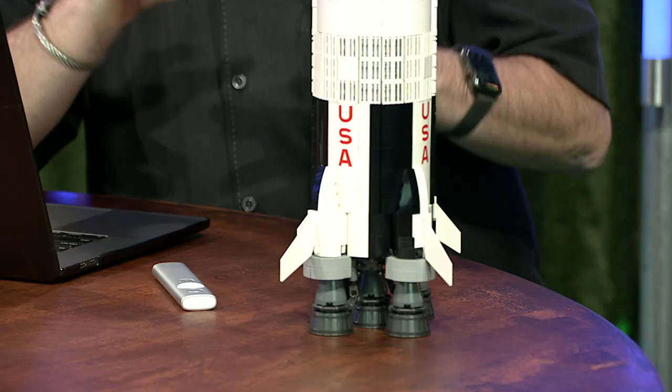So this is a Lego model that I built of the Saturn V. It's a complete moon rocket. It actually consists of 1,969 pieces. This was my very first Lego project that I ever built, and I built this over the holidays that have just gone by.

So to explain a little bit about this rocket, it's really a 3-stage rocket. It consists of 3 individual stages. Let's take this apart so we can actually see the individual stages here. Here's the 3rd stage that I'm taking off right now. And then this is the 2nd stage. And then we have the 1st stage here.

So let's examine what each one of those stages is kind of all about. It's a 3-stage platform. It takes 3 stages to launch a man to the moon. The complete rocket, as you can see here, weighs about 6.4 million pounds fully fueled, so about 3,000 tons fully fueled.

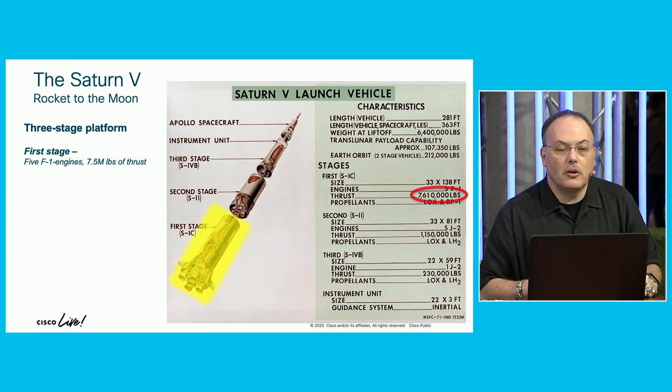It has about 7.5 million pounds of thrust in the 1st stage. So 7.5 million pounds of thrust, 6.4 million pounds of weight, 1.1 million pounds of positive thrust, and up it goes. That 7.5 million pounds of thrust comes out of 5 engines in the rocket.

Then we have the 2nd stage, which also consists of 5 engines, but they're a different type of engine called the J2 engine. This is a cryogenic engine. Altogether, they develop about 1.15 million pounds of thrust out of the 2nd stage.

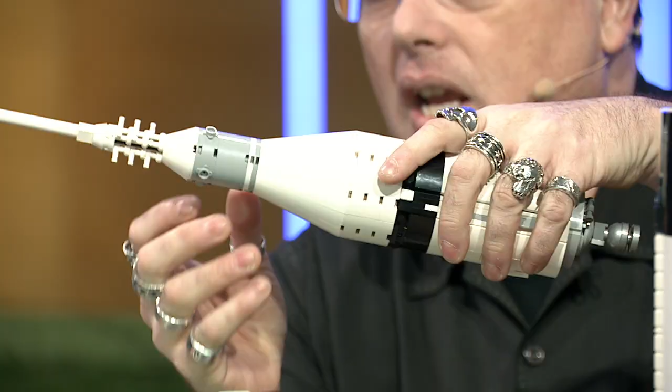And then finally, the 3rd stage, which is one J2 engine, and this is the stage that would actually take the man to the moon. This component would go into orbit around the Earth. This stage would actually burn again a 2nd time to launch the person towards the moon. Then they would jettison the 3rd stage, and the lunar module and the command service modules would actually end up going to the moon.

So we're going to talk a lot about the development of this rocket, specifically about the development of the engines on the bottom of the 1st stage, because that's really what my hero, Paul Castenholz, worked on and perfected - the rocket engines that are in there.

So this vehicle is one of the most complex machines that's ever been built by humans. It had over 3 million parts in the rocket in total and stood fully assembled over 363 feet tall. So it's just a massive, massive thing. If we had a human being standing next to this, the human being would be smaller than my fingernail here compared to the total size of this rocket, just to give you some idea of how large that actually is.

And there were actually challenges between the different teams, the German team and the American team, that were working on developing this rocket in terms of doing what they called man rating the rocket stack. In other words, how many times do we build this rocket in total before we dare to put a person on top and actually launch it? That's called man rating the rocket.

Now, if you take a look at the commitment that the United States made to getting man to the moon, you had John Kennedy, who stood up and said, this country should commit itself before the decade is out to the goal of landing a man on the moon and returning him safely to the Earth.

In other words, this is a goal: landing a man on the moon and returning him safely to the Earth, and this is the goalpost — before the decade is out.

In order to get to the stage where they could be prepared to launch this complete, very complex vehicle to the moon, there were two approaches to engineering that. One would be to build and test the first stage multiple times, then once perfected, build and test the second stage multiple times, and once that's perfected, build and test the third stage multiple times. If you had unlimited time, you could do that. But we had to get a man on the moon by the end of the decade, so there were just several years to get it all done, to build and assemble this massive rocket.

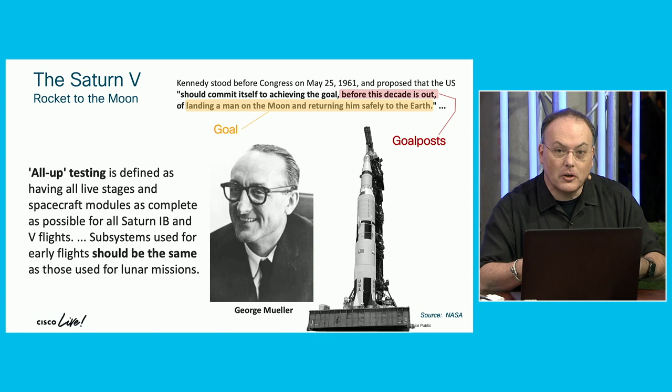So they moved to a system called all-up testing. All-up testing basically says they built the entire rocket stack all at once, all that complexity, and launched it all at the same time. This was the concept of all-up testing, which was really the brainchild of a gentleman named George Mueller, who pushed this concept through considerable resistance initially inside the organization. But eventually they had to move to all-up testing to meet this timeline, to meet this goal. You can imagine the pressure on the engineers to achieve such a complex thing in such a short amount of time.

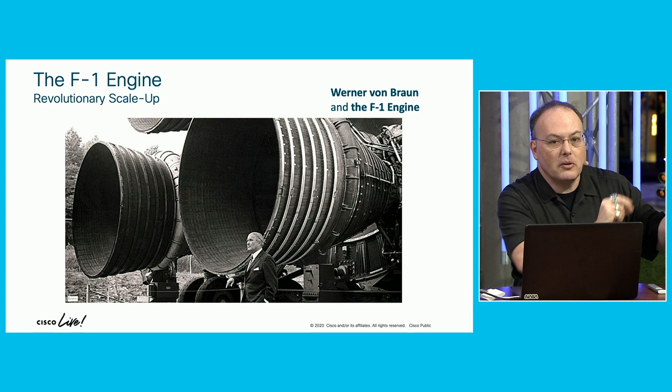Now the F1 engine on the bottom of the rocket was revolutionary, much bigger than any other engine that had ever been built before. Here's a picture of Werner von Braun, the father of the Saturn V, the inventor of Saturn V in many ways, next to a picture of just one of the F1 engines. You can see the massive scale of that F1 engine compared to a human being — they're just massively huge.

Now we're going to talk a lot about the engineering of the F1 engine, but what I'd really like to do is let the engine speak for itself for just a minute and let you observe the awesome power of this engine during liftoff. So let's take a look at that.

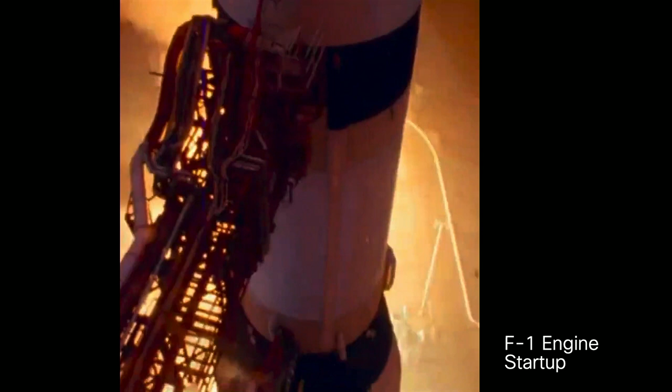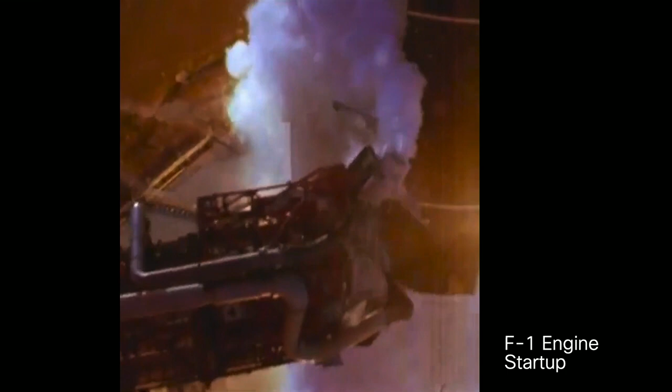Just astounding to see the power of these engines. I never get tired of watching these videos.

So the F1 engine was the instrumental component used for the first stage engine in the moon launch, the engines on the bottom of the first stage. And what did this first stage actually do during launch? Well, it launched the entire rocket stack — remember, 6.4 million pounds of rocket — 50 miles downrange, 40 miles in altitude, and accelerated the rocket up to Mach 7, seven times the speed of sound. It only lasted 2.5 minutes during flight before they would cut off the first stage and go to the second stage, and during that 2.5 minutes it would burn 4.5 million pounds of fuel.

So it's astounding that this engine was much bigger than any previous engine — on the order of 10 times bigger than any engine successfully built before. It was a massive engineering problem to build something that big. In rocketry, when you increase the power on a rocket by 10 to 20 percent, you've achieved something fairly significant. Here they were going 500 to 1,000 percent bigger than rocket engines previously built. And that's what you have to do to get to the moon.

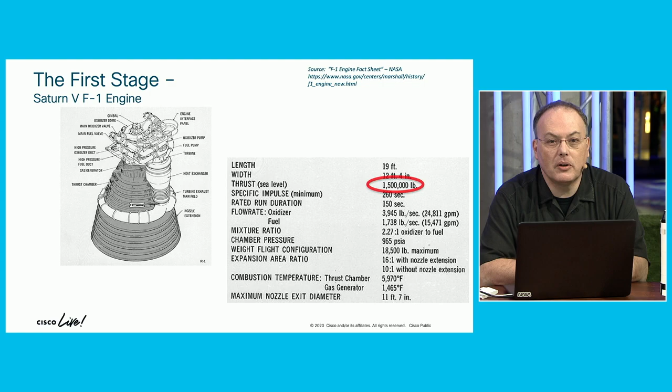Here's a close-up view of a little bit of the F1 engine. I'll point out a few key components: 1.5 million pounds of thrust per engine. This is the biggest liquid-fueled rocket engine, even to date, that's ever been built. It had a chamber pressure approaching 1,000 psi inside, and a temperature inside the combustion chamber approaching 6,000 degrees.

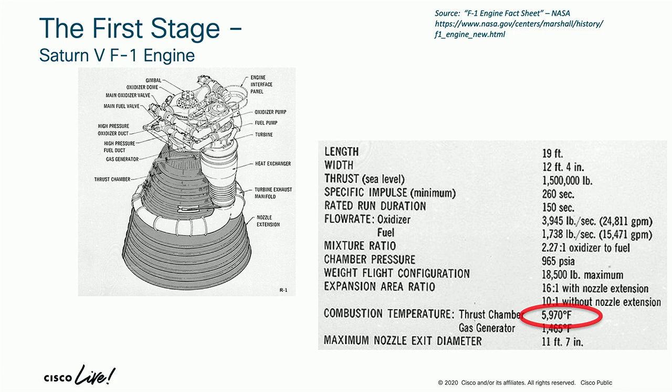So imagine the materials that you have to build this out of to withstand that kind of temperature and pressure.

Let's zoom up a little bit on the top of that engine. This is a picture I took of the back of one of those engines when I was visiting Cape Canaveral at Kennedy Space Center. One of the things I've circled, if you can see it, is this component right in the center, which is the injector plate that person was washing off on the deck of the ship before. That's what sits right at the top of the engine bell, and the injector plate is where the fuel comes together, what we call RP1 and LOX.

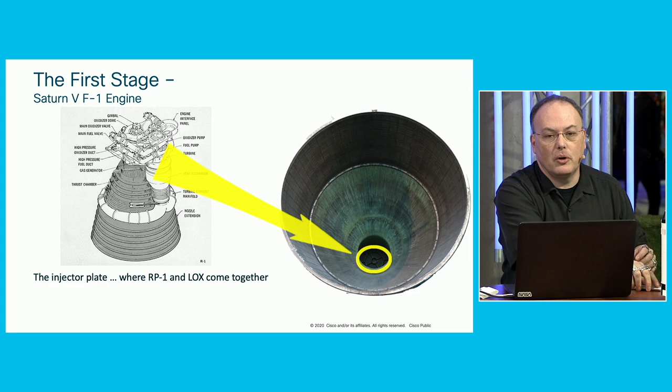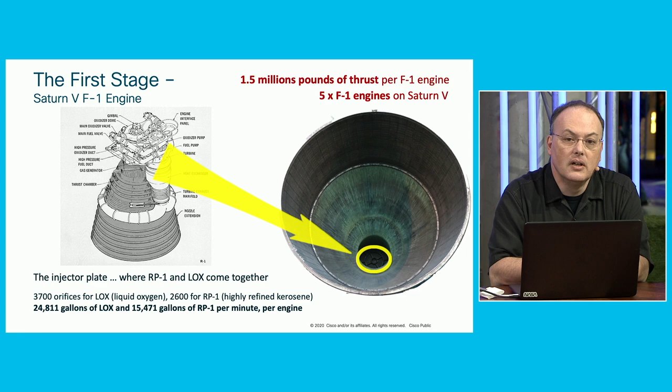RP1 is rocket propellant 1. It's basically a highly refined form of kerosene, and liquid oxygen come together at the injector plate, mix, combust and burn. So the fuel rates through that engine are pretty astounding: 24,000 gallons of liquid oxygen and 15,000 gallons of RP1 per minute per engine. That type of flow rate, with 5 engines on the bottom of the Saturn V, will empty an Olympic-sized swimming pool full of fuel within about 3 minutes. It's just an astounding amount of fuel that has to flow through these injector plates.

Now the big problem they had when they developed this engine is it's what we call dynamically unstable. Let me explain what that means. When the engine is burning and the fuel is combusting, there are pressure waves that form within the engine bell. This is normal and natural, but the engine waves need to dampen themselves out so that we don't get a self-reinforcing construct going, where if the pressure waves start to feed on themselves, the engine within a couple of seconds will either melt or explode.

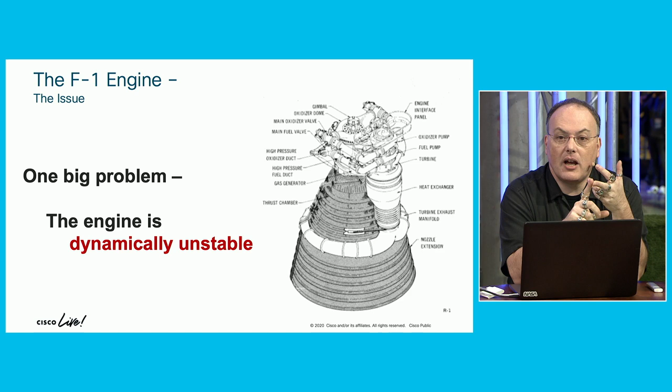And if that's happening below 6 million pounds of highly volatile rocket fuel, it would instantly be adios rocket, adios astronauts, and because that would be happening live on national TV, adios moon program. So it's very, very important to solve this problem of the instability of these engines.

Now, what they do when they're testing engines is they put them onto a test stand out in the desert, and they test to see how well the rocket works. So we burn it for a few seconds, and a few seconds more, and a few seconds more, up until the full rated thrust of the engine.

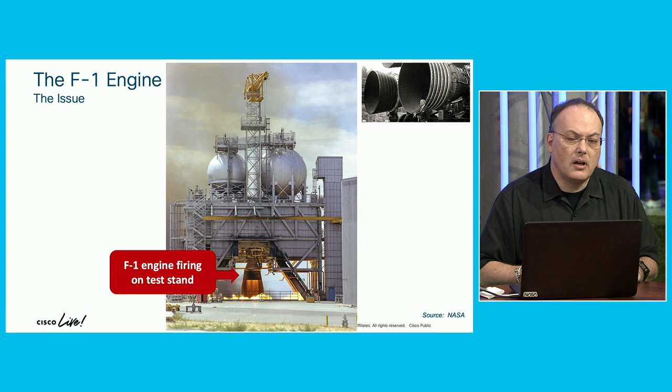On June 28th, 1962, combustion instability resulted in a total loss of one of these F1 engines. When they were putting it on a test stand like this, you can see the big fuel tanks up top, and the engine burning at the bottom, just like we saw in the video. One of these engines basically exploded on the test stand, totally destroyed the test stand, fuel everywhere, rocket components everywhere, and if that had happened for real during a launch, it would have been a total loss of the rocket.

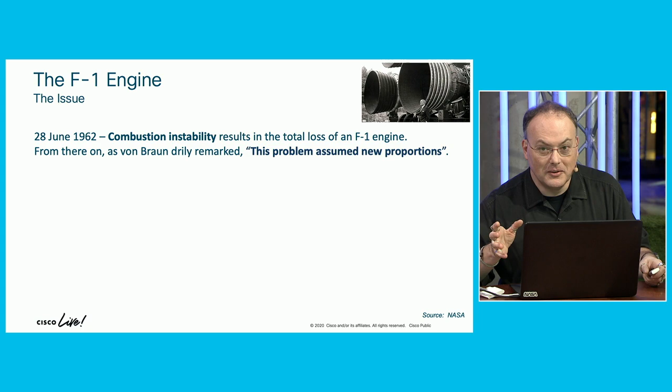So as von Braun dryly remarked at that point, this problem of combustion instability assumed new proportions, right? It's taking a gentle stab at it, I suppose.

This problem really got handed to a team led by 3 people to fix: Jerry Thomson from NASA, my hero Paul Castenholz, and Dan Klute from Rocketdyne, the company that was actually building the rockets. They have to diagnose the problem, come up with a solution, and test the F1 unit until they can certify it as flight ready.

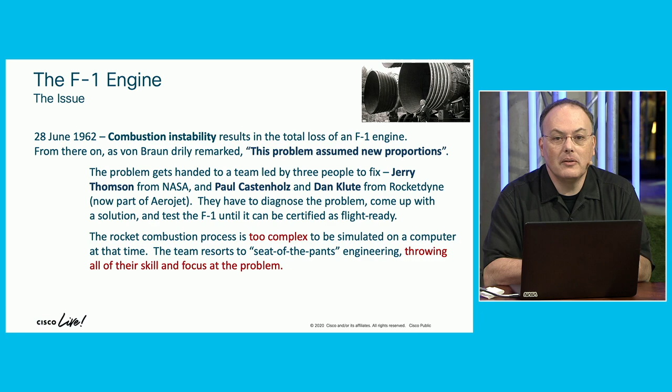Now, this combustion process is too complex to be simulated on a computer. They basically have to resort to seat-of-the-pants engineering, throwing all their skill and focus at solving this problem. And what's at stake here? If they can't fix this engine, nothing else matters. The entire moon program rests on getting these engines on the bottom of the Saturn V to work, and to work reliably. In other words, this is a situation: they have to solve the problem. It's a complication, too complex to simulate, and this is the implication of what's at stake if they can't fix this problem.

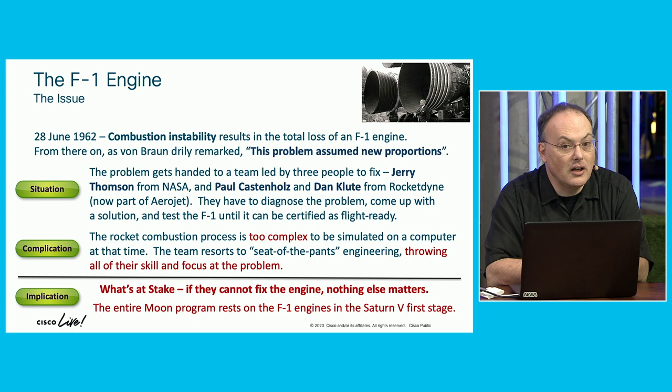Now let's zoom in a little bit more on that. This problem actually took over 24 months to solve, over 2 years to perfect this engine. But this wasn't just happening in isolation.

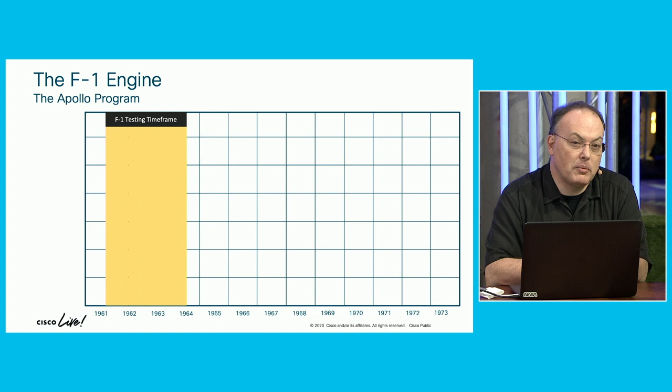If we take a look at the timeline here, up to and through the moon landings, this was a timeline when they were working on testing and perfecting, if they could perfect it, the F1 engine. About that 2-year period. But all of Project Apollo was going on at the same time.

I've adjusted the costs here of Project Apollo into today's dollars, and you can see through this graph that at the peak of Project Apollo, it was over $40 billion a year being expended on the moon program. Over $200 billion in total in terms of adjusted dollars.

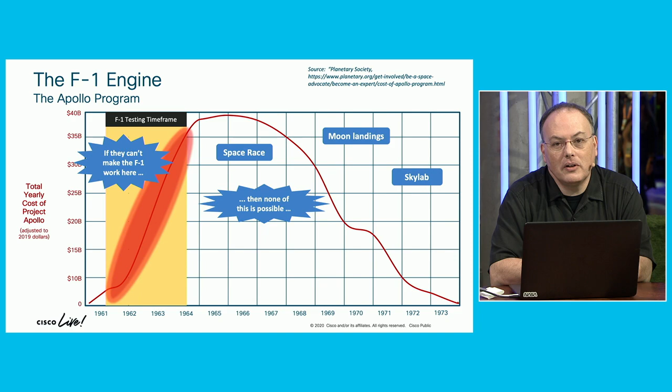And if they can't get the F1 engine working during this period, this 2-year period where they have to basically solve all the problems with it, then none of the rest of this is going to be possible. There aren't going to be any moon landings. There isn't going to be a space race. There won't be Skylab. There won't be all the things that came out of the Apollo program.

And you also have to remember, this wasn't happening in isolation. All the rest of the Apollo program was going on at the same time. The people developing the second stage, the third stage, the lander, and the Apollo spacecraft, the command service module, all being developed at the same time. The ground support facilities, everything else, all the subcontractors. There were over 400,000 people working on Project Apollo at the peak.

But if these 3 people leading this team can't solve this problem, there's not going to be any moon landing. So imagine the pressure on these engineers to solve this problem.

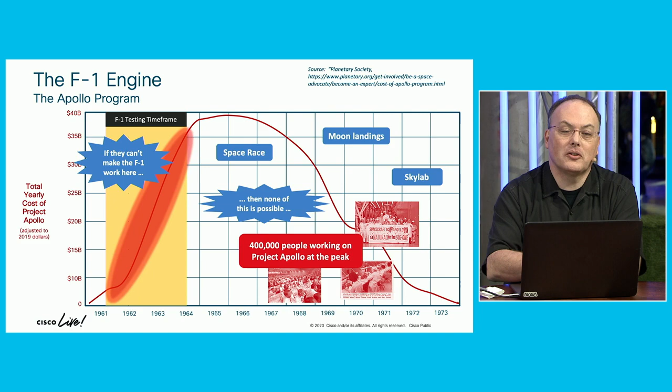Now, this also didn't happen in isolation. It got out into the press that there were problems with the development of the moon rocket. This was public. It wasn't just happening in private. It was happening very publicly that they had a problem in developing these large rocket engines and getting them to work and to work reliably.

So it turned out it was actually useless to try to design the F1 engine so it never went unstable. The engine was too big. There were too many complications. It was subject to too many disturbances inside the engine. They could never dampen out the instabilities entirely.

What they needed to do was move to a concept called dynamic stability, which meant that once the instability started to happen, the engine would automatically correct itself, and they needed to do that within a maximum of 400 milliseconds. So once a disturbance started to happen, it would dampen itself out within 400 milliseconds.

Now, they developed a component inside the engine called the rough combustion cutoff, so that if the combustion became unstable for longer than that, the engine would automatically shut down so they wouldn't keep destroying engines during testing. However, the problem is that doesn't work for a real launch, because if you're launching the rocket and the engine cuts off, you don't have enough thrust to get into orbit. So they really had to solve this problem of combustion instability.

Now, the key to this was the injector plate. Remember that piece that the person was washing off with the hose on top of the deck of the ship? That's why when I saw this picture, I was so excited about this injector plate, seeing it for real and recovered from the bottom of the ocean, because this was the key, the heart of the system.

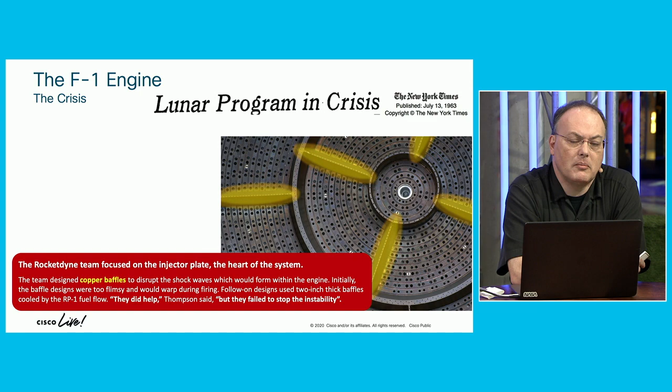So the engineers initially installed a series of copper baffles. I've highlighted some of them here so you can see them. These help to control part of the problem. They basically had problems developing these too, because the initial ones they put in were too flimsy. They warped under the pressure of the massive flame that the engine would burn with. And so a few quotes here from Jerry Thomson.

We tried every trick we could think of. It got so the engineers couldn't come up with a theory for the plate that they hadn't tried before. So they had to keep iterating and iterating and iterating at this problem. And one of the big challenges they had is that the combustion instability was both intermittent and unpredictable.

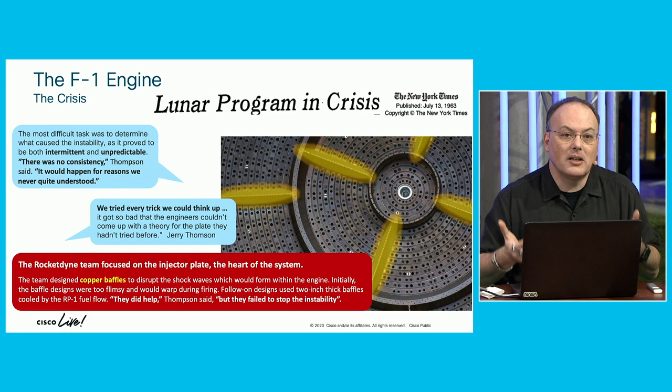Does that sound familiar to anybody who's dealt with networks before? Intermittent, unpredictable problems? I think as network engineers, we can kind of empathize with that. There was no consistency. The combustion instability would happen for reasons that the engineers never really quite understood. So they had to keep iterating and iterating on solving this problem without necessarily having a great definition of what the problem was. Now, they eventually got to a point where the engine would no longer become dynamically unstable. But that wasn't good enough for these engineers.

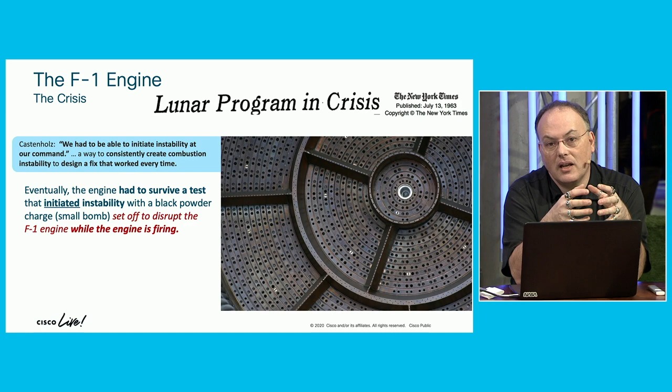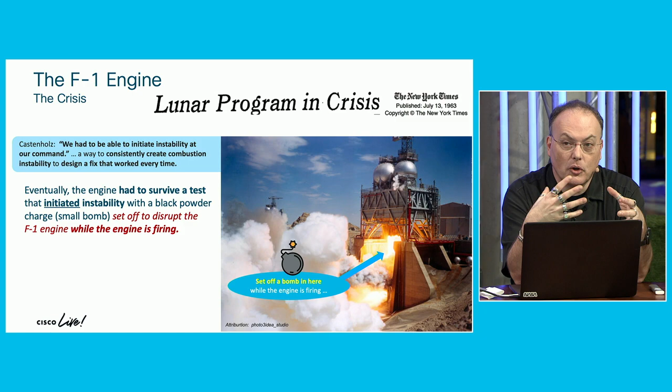They decided that they had to introduce instability into the engine. In other words, they wanted to be able to produce instability on command. So what they would do is develop a test where they would initiate instability by putting a black powder charge, basically a bomb, inside the engine bell and set that off while the engine is firing. They would set off a bomb inside the engine that would cause a massive momentary overpressure, and the engine had to survive that too. Obviously that could never happen for real in flight, but they needed to introduce the worst possible instability, and then the engine had to dampen this out as well.

So really it became about testing and iterating, small refinements, small steps forward to move towards their goal. In mid-1964, they came to a conclusion of changing the angles of the holes within the injector plate. This reduced the efficiency of the engine a little bit, but it markedly improved combustion stability. So more and more adjustments were made till eventually they could set off a bomb inside the engine bell while the engine was firing, and the engine would dampen out that instability, not in 400 milliseconds, but in 100 milliseconds.

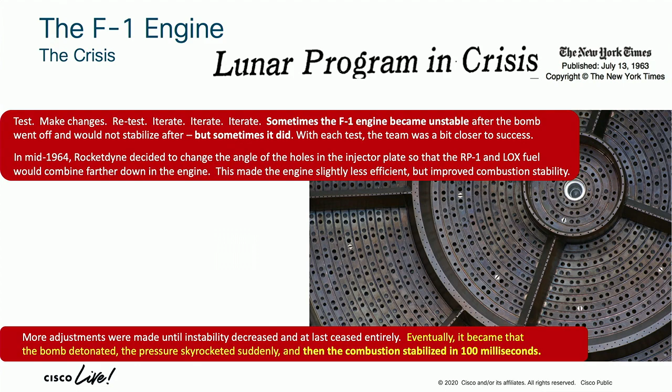So this was a major, major achievement in terms of making this engine stable enough to launch people on. And this really, for Rocketdyne, was the turning point.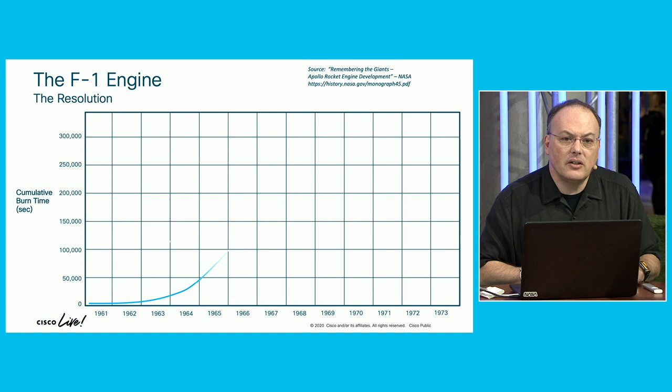If we take a look at this graph, it shows the cumulative burn time on the F1 engine. You can see how it starts off with not very much burn time in 1962 and 1963, and they're getting more and more time burning and testing the engine. That 2-year plus period we talked about before was broken into about 7 months of testing with low thrust and about 11 months of testing with full rated thrust, so about 18 months of testing, during which they would test and refine for that spontaneous instability problem.

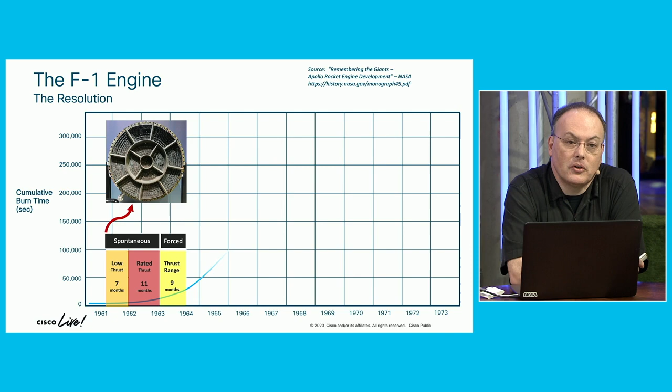And then about 9 months more of testing with forced instability, that's setting off the bomb inside the engine bell. So by the time they got to the end of this, they had a very smooth running engine that would work smoothly under almost any conditions.

And you can see from there, they got more and more burn time into the engines to a point where they were ready to actually do the first full flight. Remember, we talked about all-up testing, because this is just the first stage, but they were also testing the second stage, the third stage, all-up testing, first flight of the Apollo Saturn V moon rocket.

The first crew was put on the rocket here in late 1968 with Apollo 8, and they orbited the moon. Apollo 11 launched in July 1969, landed on the moon on July 20th, and then all of the follow-on missions, and even beyond Apollo, including into Skylab.

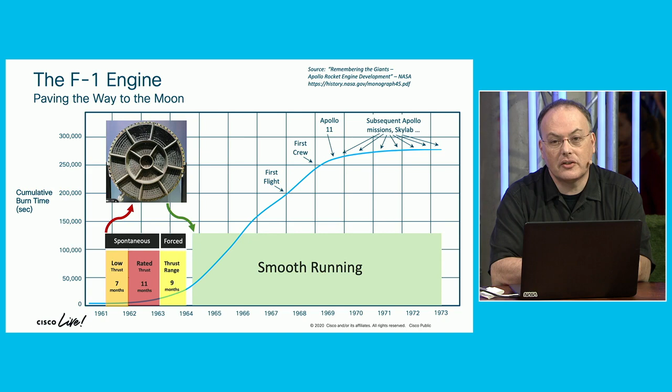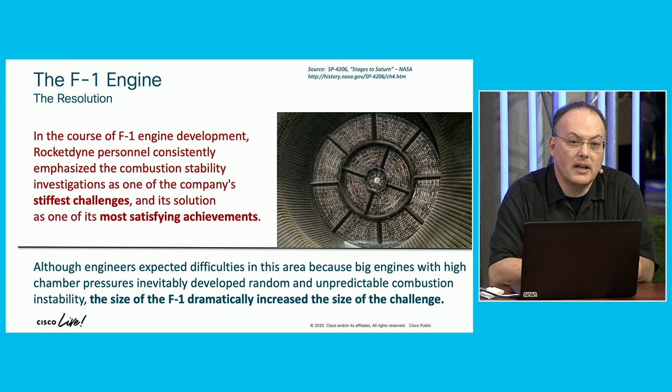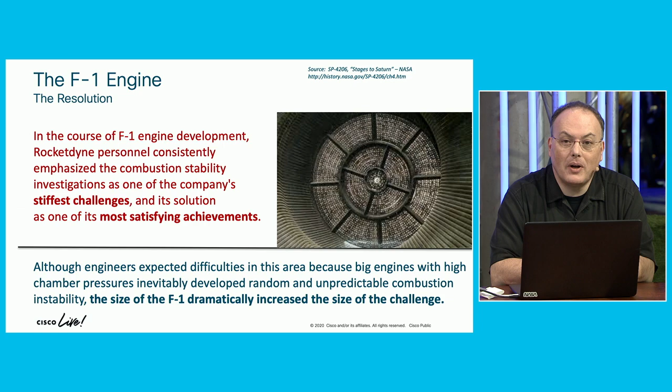If we take a look at what was achieved here, Rocketdyne will say that one of the stiffest challenges the company ever faced was their combustion stability investigations, and solving those was one of their most satisfying achievements. All rocket engines have this concept to some level of combustion instability, but the huge size of these engines dramatically increased the size of the challenge in terms of solving it. And that injector plate was really key to solving it. That's why I make the assertion that this was the key component that got a man to the moon.

Now here's the result.

The Saturn V is one of the most successful launch vehicles ever launched, never suffered a catastrophic failure of the F1 engines. Look at that rocket in flight. Remember, the rocket itself is 363 feet tall, but the flame coming out of the back of those engines is a third of a mile long.

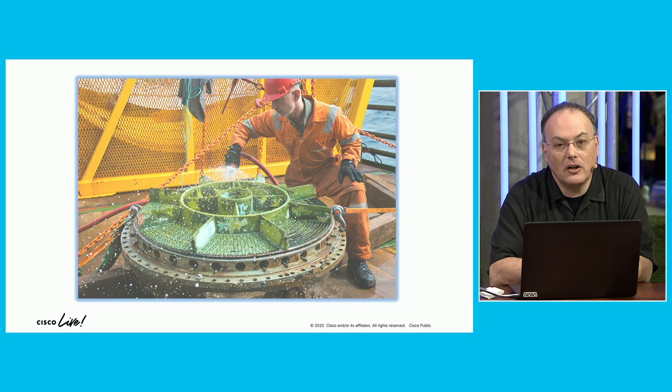It's just incredible, the power and the capability of these engines, and it was really an engineering triumph to create these. That's why I got so excited when I saw this picture of a person sitting on the deck of a ship washing off that component, washing off the injector plate, because to me this is the central component that put a person on the moon, an incredible feat of engineering. Remember, this really came down to only a few people to solve this out of 400,000 working on Project Apollo.

So how is this related to what you, as a network engineer, do every day? I really like rocketry. I hope you can sense some of my passion about rockets and high-performance aircraft and this kind of thing. I'm very, very passionate, very interested in those things. But how is this related to what we all do every day as network engineers?

Well, we're not building a rocket with 3 million parts, but we do build networks that have thousands of devices, tens of thousands of users, hundreds of applications, quality of service, embedded security, all the different functionality, multi-pathing, failover, redundancy, all the different complexity that goes into building a network. And I would argue that effectively what we're building with networks is a huge distributed machine. Just like the complexity of a rocket, we're building the complexity of the massive networks that we all work on. So in my opinion, it's very comparable.

And also, just like the moon landings depended on this rocket, your company absolutely depends on the network. Think about what happens in an organization if you take the network away. If you've got a major hospital, and the network simply goes down, goes away, that's probably pretty catastrophic to the proper functioning of that organization. So companies that you deal with, no matter what industry you're in, manufacturing, healthcare, retail, everybody depends on the networks that we all build, that you build.

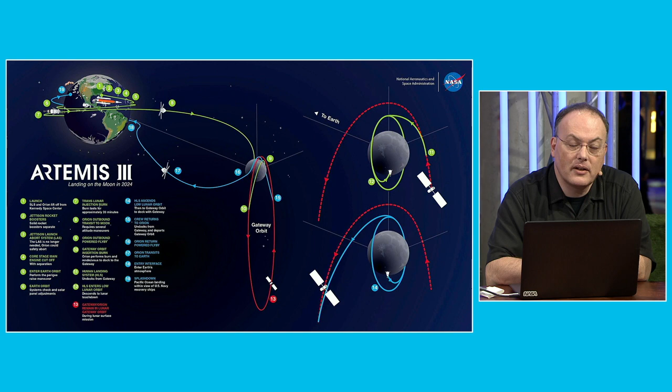And that will actually launch on a new rocket that NASA is building called Space Launch System. This will actually also dock in orbit around the moon with a new space station that will be built that won't orbit the Earth, it won't be in Earth orbit, it will orbit the moon. This space station will be called Lunar Gateway, and it's actually what the astronauts will dock with, work there before they go down to the moon surface and after they come back up. So we'll actually have a space station, not just in orbit around the Earth, International Space Station, but in orbit around the moon as well with Lunar Gateway.

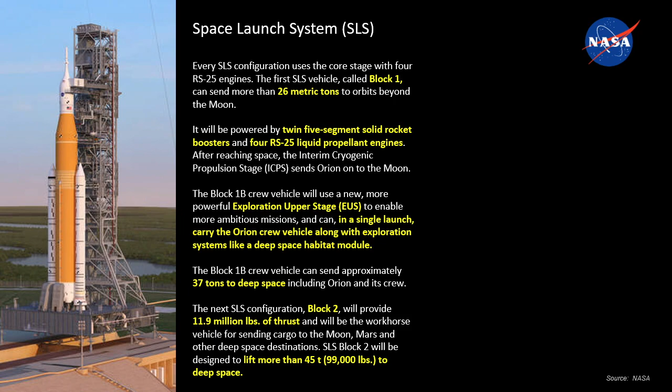This will be twin 5-segment solid rocket boosters on the side, very similar to ones with the space shuttle, but more powerful. And they'll actually be reusing the main space shuttle engines that my hero Paul Kastenholz was program manager on, the RS-25s. They will be reusing those on the core stage as well.

And by the way, the core stage of this just rolled out of the Michoud assembly plant last month, so they are making good progress now on putting SLS together.

This will be enhanced in future with a Block 1B exploration upper stage, which will actually have the power to get humans to the moon and potentially farther out into deep space as well. It can launch a bigger payload.

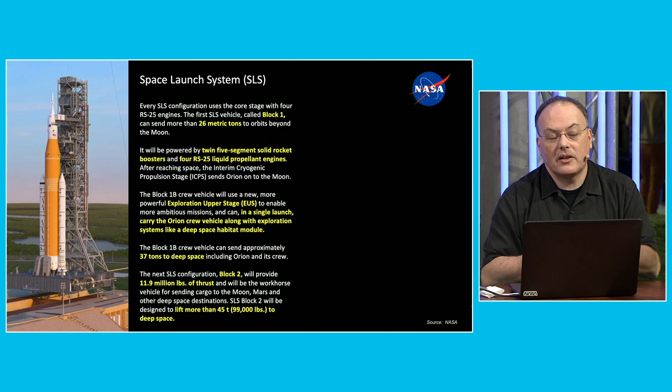And then beyond that, we'll go to Block 2 of SLS, which will have a total, amazingly, of 11.9 million pounds of total thrust. If you compare that to the Saturn V, the biggest rocket that's ever launched before, that was 7.5 million pounds. Now we're going to be at almost 12 million pounds of thrust, and this would give us the ability to lift up to 45 tons of payload out into deep space.

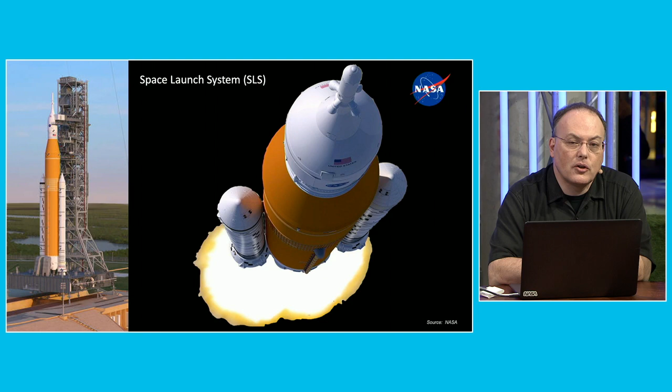So this will be a pretty amazing rocket when it launches, and it's currently slated to launch for the first time with Block 1 next year.

Now beyond that, of course, there's also a lot of other things happening in rocketry. We have SpaceX, who's been developing amazing rockets, starting with the Falcon 1 in 2008, which was SpaceX's first rocket they launched into orbit, and that was designed to carry the Dragon capsule.

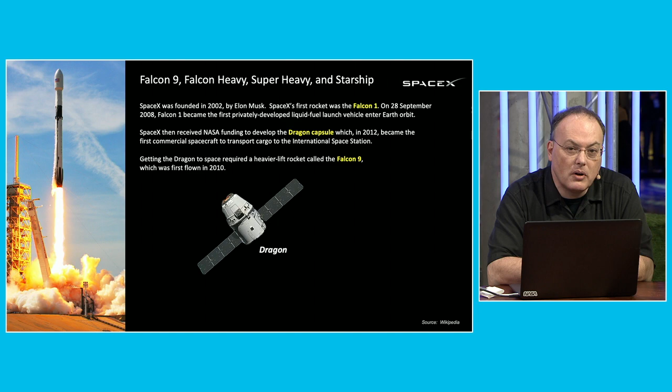Now, one of the things that was just tested recently, about a week ago, was Crew Dragon. Crew Dragon is the module that will allow humans to be launched on top of a Falcon 9 rocket and carried back in orbit from US soil to the International Space Station, carrying US astronauts there. Now, this just went through a test where NASA actually blew up a Falcon 9 rocket.

They launched it, exploded the rocket deliberately partway through flight, and tested the crew escape system, those rockets on the side called Super Draco rockets that launched the capsule off the top. Basically, that would be used for the astronauts to escape if there was a real emergency during launch.

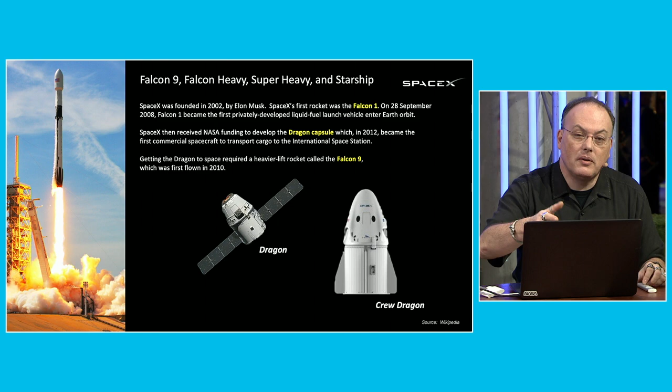So that was really the last big test that they have to go through with the Crew Dragon before launching it for real up into space.

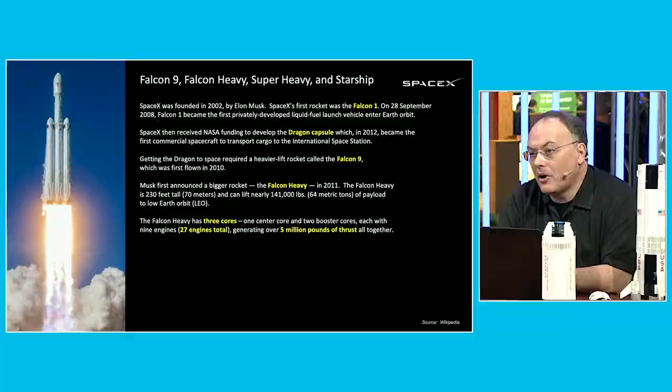Now, beyond this, of course, the next stage is the rocket which was first tested last year, Falcon Heavy. Falcon Heavy is very interesting. It's actually a 3-core rocket, 2 outer cores and an inner core. And of course, the real innovation that SpaceX has brought into the market is the concept of reusability.

I don't know if you got a chance to watch the first Falcon Heavy launch, but it was an absolutely amazing launch. They used clustering technology with the rockets on the bottom, so it has a total of 27 rocket engines that Falcon Heavy launches on, 9 in each one of the 3 cores.

And it was just amazing to watch not only this rocket launch, but to have the 2 cores come back and land in synchronization. It was beautiful, almost like ballet, watching the 2 rocket cores land after propelling the main core out into space. It was incredible to watch.

So this concept of reusability is really the key component that SpaceX has brought. Now, in addition, they're working on other rockets beyond this, like Starship, for example. Starship will be an even heavier lift rocket, and this is really part of Elon Musk's plan to take human beings well beyond Earth orbit and out, in fact, to Mars, and to create ultimately a self-sustaining colony on Mars.

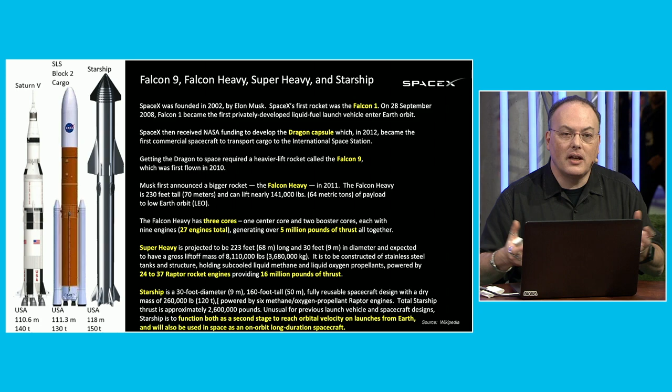There's incredible work being done by SpaceX and other private space contractors. I wish I had time to talk about everybody doing things in space these days, because there are many companies working in this area, but SpaceX is doing some pretty amazing things.

We've seen heavy lift rockets like Saturn V. A lot of people don't know the Soviet Union was actually developing a competitor to Saturn V to get a man to the moon, called the N1 moon rocket, of comparable size and scale. There's also the Energia rocket developed by Russia, Falcon Heavy which we talked about, and boosters from elsewhere, like the Russian Yenisei rocket and the Long March 9, which is currently under development and hasn't launched yet. And as I mentioned, things like SLS Block 2 and Starship. These are all different heavy lift rockets under development right now.

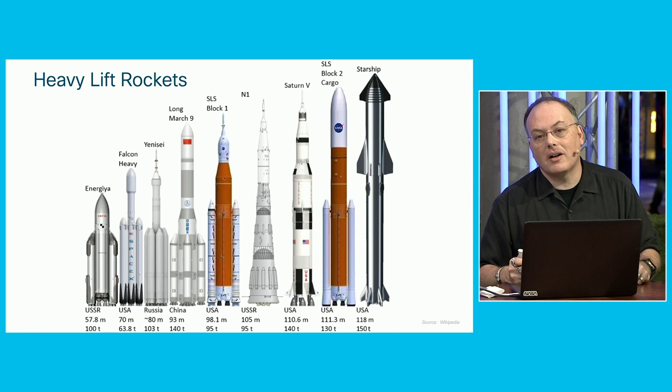I think these are, in many ways, very comparable to the heavy lift networks that we all build. SD-Access, SD-WAN, data centers—all of these massive networks we build are, in my opinion, very comparable in terms of complexity and mission criticality to the rockets we're examining, designing, and building. So let me wrap up and conclude with where I started.

I think it's very important in your life to have heroes, people you look up to that embody some of the things you want to be. And maybe one of those heroes is who you already are. I can pretty much state that a lot of people are already heroes in somebody else's life. So you may already be a hero—that might be to people in your family, it might be your coworkers—but it's very important for you to be a hero to them. It's also important to have heroes, because heroes are who you can aspire to be.

When I think about one of my heroes, Paul Castenholz, I think about the qualities he embodied. I think about the capabilities and the things he accomplished, and it's absolutely phenomenal. It's very inspirational for me to have people like that to look up to, and I think you can think about this in your own life—many different places where you have heroes, or people who are heroes to you in different ways.